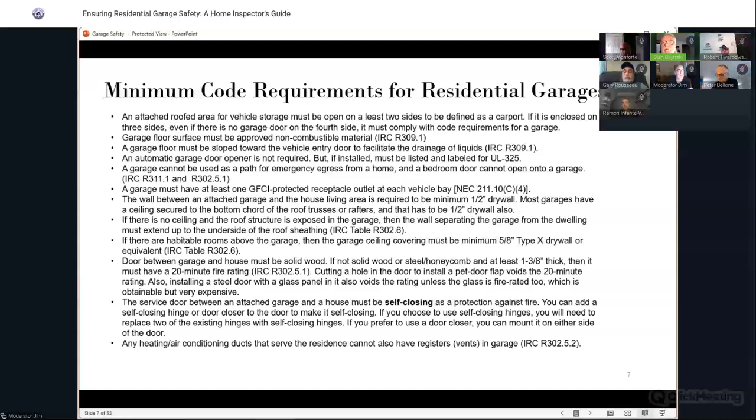I see people do that a lot because they're doing something in the garage even in the wintertime, whether they're woodworking or whatever, and they try to get a little bit of heat in there. So they cut a register into a duct that's passing through, and it's usually homeowner or aftermarket kind of stuff. All right, Jim. On that too, Stan, flex duct. It talks about the type of ductwork running through the garage, but you'll see guys that'll run flex. Yeah, we're going to get into some of that down the line here.

So the garage, like Rodney Dangerfield, does not get any respect from the standards of practice. To me, it should be addressed as a standalone component of the home. That's the way I feel. So the Connecticut standards, which I am most familiar with, on interior, say the inspector shall inspect all the interior stuff. And then at the end, they throw in garage doors and garage door operators. They don't say anything about safeties. They leave that open to interpretation. Our standards were meant to get us all to do a minimum of the same things, but it also opens everything up to interpretation by the individual home inspector.

In Massachusetts, they go farther. On their exterior, the inspector shall observe and report on garage doors if the garage is attached to the main dwelling, and operate garage doors if the garage is attached to the main dwelling, manually or by using permanently installed controls of any garage door operator. Report whether or not any garage door operator will automatically reverse or stop when meeting resistance during closing. Now, that's what should be in Connecticut's, in my opinion.

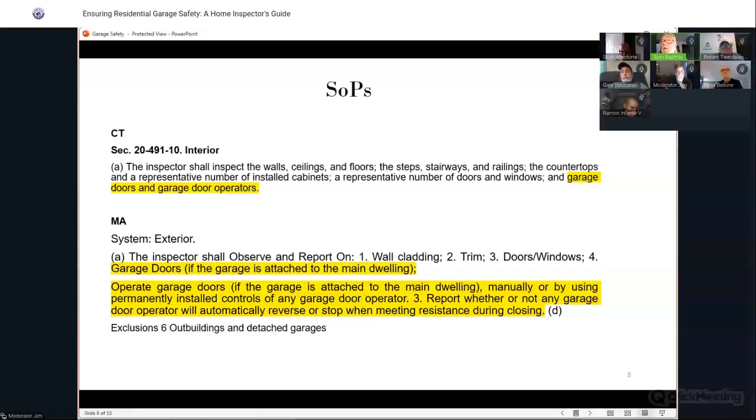But look at exclusion 6 down there. Outbuildings and detached garages are excluded. What is the difference between a detached garage and an attached garage? Why? And most standards are like that. Why do we not have to, at least to the standards, inspect a detached garage the same way we would do an attached garage?

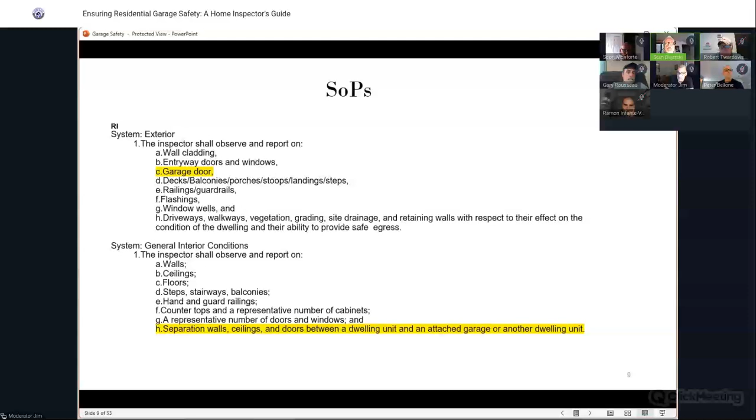Okay, Jim. So Rhode Island, exterior: garage doors. That's it. And then on interior, separation walls, ceilings, and doors between the dwelling unit and an attached garage or another dwelling unit. So at least they go a little further there. Florida, interior components, they include the garage door. And Jersey, garage doors, including automatic door openers and entrapment protection mechanisms, excluding remote control devices.

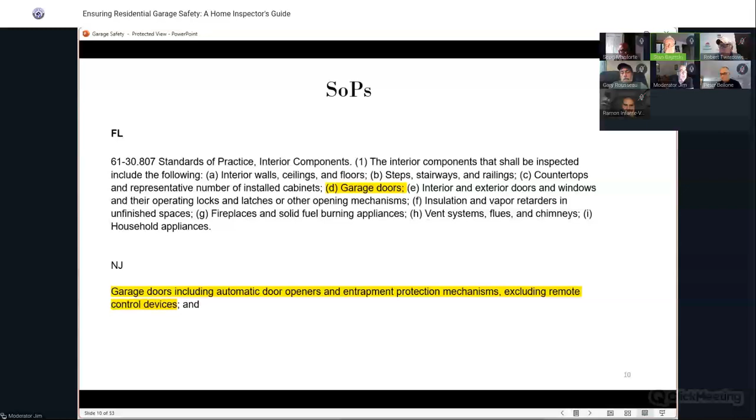So even though the standards are kind of thin and don't get into a lot of detail, most inspectors are using some kind of inspection program now, software. We all know, if you're using those, that they come through with a lot of stuff. And I had to take a lot of stuff that I didn't want to use out of my report. But at least all the things that we should be looking at are in there, and it's not just the minimal standards.

So walls and ceilings. The wall between an attached garage, some of this might be repetitive, but we're going to go through it anyways. The wall between an attached garage and the house living area is required to have minimum half-inch drywall. Most garages have a ceiling secured to the bottom chord of the roof trusses or rafters, and that has to be at least half-inch, like we said before. If there is no ceiling, then the separating wall must be sheetrocked all the way up to the peak.

There is a high incidence of fires started in the garage due to gasoline and other flammable materials often stored there. And either way, the intent is to create a half-inch drywall barrier between the garage and the house for fire protection.

So I don't have control of my mouse today. Jim is running this.

So only common walls, thank you, Jim, between garage and the house, not perpendicular walls, must meet this requirement. If a garage is detached but within 3 feet of the residence, any walls within 3 feet must have half-inch drywall. When there is a living space above the garage, the ceiling requirement ramps up to 5/8 type X fire rated drywall. Now, this brings up the question of breezeways.

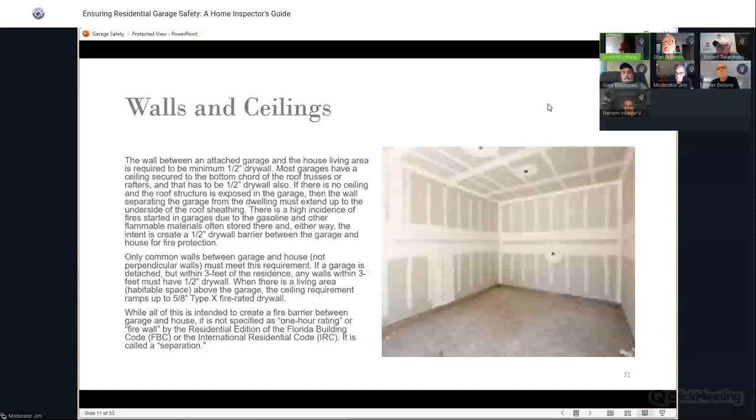So, there's a couple. I know Jim's got the slides. There's a couple of questions. I was laughing too, because we see the storm doors all the time. They'll put a storm door with a screen and leave the door wide open into the garage. That's a no-no, because now there's no self-closing hinges on there.

The other thing they ask is, are fire damper registers allowed, like they put in apartments? At some point, they blow open and close. I'm assuming that's what he's talking about. I would say if there's a damper and it opens up and there's a car fire or fire in the garage, I would say no.

Mass. Gary knows about this, right? Gary, you're saying you have to do a separate inspection for a detached garage? They're saying, in Mass, you have to do a separate inspection for any detached structure, right? Yeah, separate detached structures, you're supposed to start a whole new inspection. Can you put that in your report as just a detached garage, and then go through it? I do, but they would prefer us to start an entire new inspection just on that one building.

Why? Because it's a separate structure? Separate structure, separate building, lots of times has its own electric panel, heat system. So they like starting a whole new inspection. Oh, more money, more money.

And there's another one in here too, Stan. It said new lithium battery chargers for the cars can catch on fire, which is true. That's why our city is not putting them in this new parking garage.

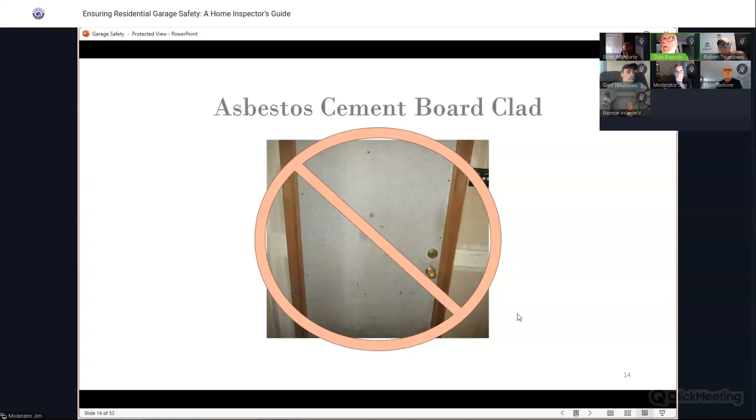I also bring up the environmental concerns regarding the asbestos, even though in that condition it's not an issue, but if you damage it. And do you know if that's a 20-minute fire rated door with that asbestos? I don't know that. So I always tell them to replace it with a fire rated door. This is a hollow core slab door. Gotta go.

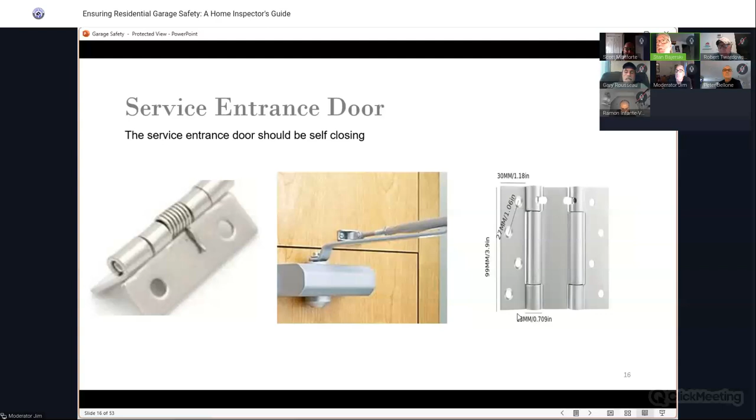Next, Jim. These are service entrance door hinges, called self-closing hinges. There's a realtor I work with who also flips. He bought a house that was on fire in Milford here and was renovating it. They put a new service entrance door in, and they put 2 self-closing hinges on it. When the inspector came, the door didn't close 100%. It closed like 98%, but it didn't latch properly. So they had to put the 3rd one on, and it worked like a charm.

So here we go with the ducts and other penetrations. Ducts in the garage and ducts penetrating the walls or ceiling separating the dwelling from the garage shall be constructed of a minimum number 26 gauge sheet steel, 1-inch minimum rigid non-metallic class O or class 1 ductboard, or maybe that's a 0, I don't know, or other approved materials, and shall not have openings into the garage.

Now, I'm not telling you this and expecting you to pull out a gauge and chop a piece of the duct off and make sure it's 26 gauge. It's just to know that there are certain requirements. Class 0 or O is defined as air ducts and connectors having burning characteristics of 0. Class 1 means air ducts and connectors having a flame spread index of not over 25 without evidence of continued progressive combustion and a smoke developed index of not over 50. The duct boards are marked with their class ratings as an imprint or sticker on the board.

Any type of register or grill in the ceiling of the garage that opens directly into the attic over the home is not allowed. We occasionally see vents retrofitted to provide ventilation to cool a hot garage in the summer, or to provide combustion air for a gas furnace or water heater in the garage. Combustion air can also be provided by a vent through the wall. Next, Jim.

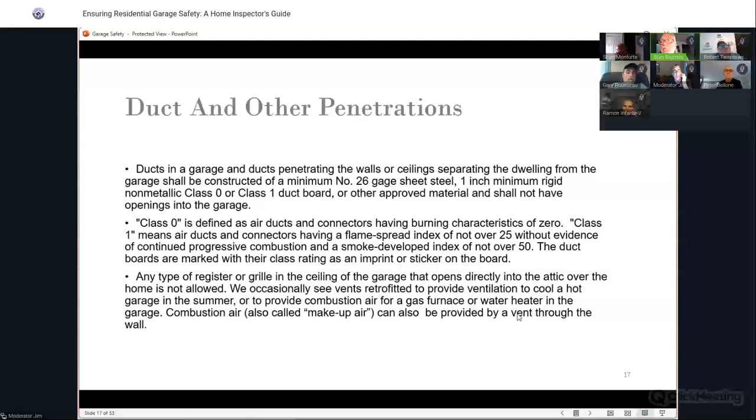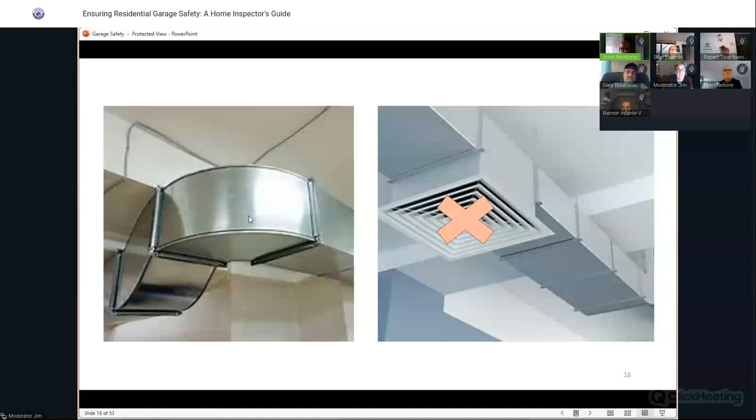I did a condo complex in Rocky Hill. Every single unit, I actually did 2 within a month, and I got a call from the town of Rocky Hill building department telling me to stop calling out ductwork in the garage because the town says it's okay because of the thickness of the steel. So I said, okay, what about carbon monoxide? What about little joints and stuff like that? It doesn't have to be encapsulated? And they said no. If anything, Jim, you want to insulate it and use some foil tape around it. That's what I would do. The duct itself is fine. And then obviously a carbon monoxide detector in the house, and then you're covered. Okay.

Other penetrations. Any openings around vents, pipes, ducts, cables, and wires at ceiling and floor must be sealed with an approved material to resist the free passage of flames and products of combustion. So that might be an answer to what you can do with the ductwork if you really wanted to get into that. The material filling the annular ring-shaped space around the penetration does not have to meet the ASTM E136 standards, whatever that is. Most homes have a half-inch drywall panel installed in the attic access opening, which is fine.

But when you put something else in the opening, it must be equivalent to half-inch drywall, which has roughly a 20-minute fire resistance. The 1/4-inch plywood panel at most attic ladders does not meet that standard. There are several solutions. There are fire-rated attic ladders on the market, starting at about $800 plus installation. Not cheap. They far exceed the equivalency requirements. Also, there are attic ladders that have a fire retardant applied to the plywood face. Install a non-fire resistant attic ladder somewhere in the house instead of the garage.

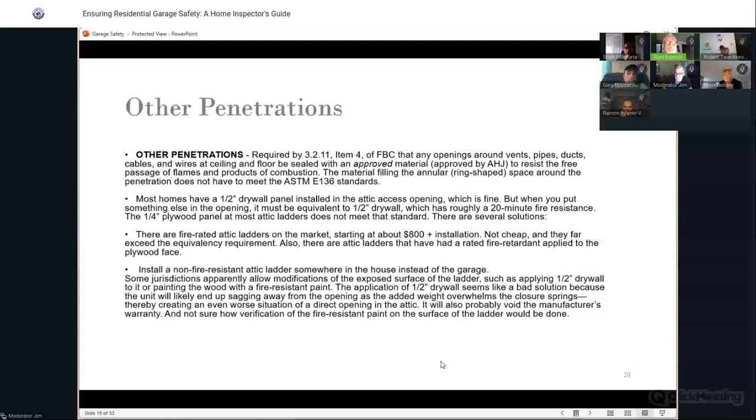Some jurisdictions apparently allow modifications of the exposed surface of the ladder, such as applying a half-inch drywall to it or painting the wood with a fire-resistant paint. I've never seen a can of paint marked fire-resistant, but maybe I haven't shopped enough. I don't know. The application of half-inch drywall seems like a bad solution because the unit will likely end up sagging because of the weight and make it worse, basically. So yeah, a lot of the foam now in attics has a fire resistant paint that's sprayed over it too. You know, a lot of that closed cell foam, open cell foam.

So this is a house I did a while back where the plywood's on there and the opening's a mess. And if you went up into the attic, this is what was there. So I told them, I don't know what your plans are for the house, and I know that that pull down makes it very easy to access that nice space up there for even storage, but you got to rock that wall all the way up to the peak. So again, even though I said that specifically, I also tell them to bring that garage up to current fire safety standards.

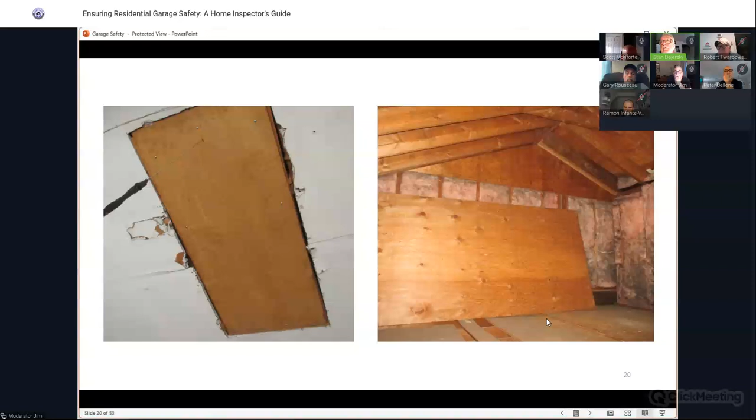So now we're going to talk about garage receptacles. Obviously, there's been a big change lately in where GFIs are supposed to be included in garages, which is everywhere now. But receptacles in the garage were first required to be GFI protected by the 1978 edition of the National Electrical Code. Initially, an exception was made for receptacle outlets that are not readily accessible, at 6 foot 8 inches or above, and receptacle outlets for dedicated appliances that are not easily movable, such as a freezer, refrigerator, or mounted sprinkler control panel.

Then in 2008, they eliminated those exceptions, and now all garage receptacles are required to be GFI protected. The mandate for ground fault circuit interrupter protection for receptacles in wet areas around the home began in the 1971 edition of the NEC, and at first only exterior receptacles and ones near a swimming pool. As the NEC has updated with new editions every 3 years, the locations required have been expanded or tweaked with almost every cycle since then.

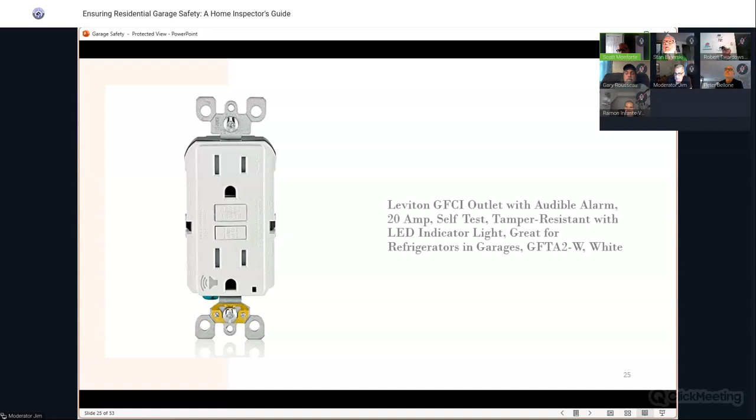Well, Jim, sometimes we've seen it before where they have a GFI that's really either on a breaker or on a bathroom or something else. So that GFI really doesn't have to be a GFI. It could be a regular outlet. So I kind of look for it. You trip it and then you've got to go look for it. But I was just going to say, I can't remember. Okay, Jim.

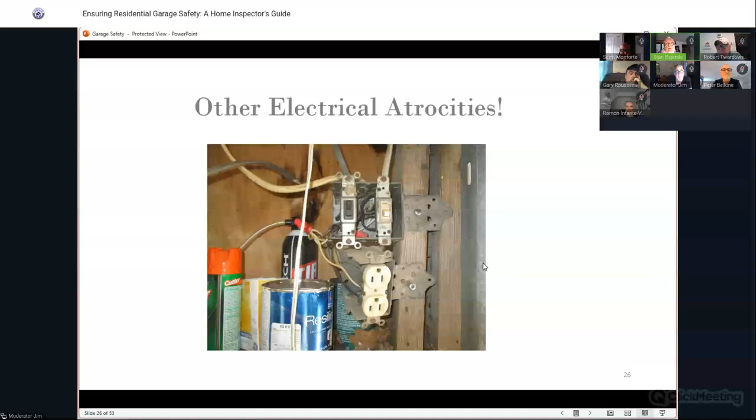And then, every other electrical issue that you can imagine can be in a garage. This is one picture. Take a look at that mess. Those electrical boxes don't have sides on them. They're wire nutted together. I don't know what that wire is just coming across the paint can there. It might be an extension cord or something. That's a freaking mess right there. So you've got to look for all that other stuff too, besides what we're talking about today.

So garage bay door safety. An imbalanced garage door can close accidentally and injure users.

Heavy garage doors can damage vehicles and property, plus the garage door components, especially the motor, wear out faster and can become damaged. There are still manually operated garage bay doors. These doors still require safety features that we can call out. So if I let a manually operated garage door go and it continues to fall, I will tell them that they should have somebody come out and adjust the spring tension cables, all that good stuff.

Balancing a garage door is necessary for safety and for the smooth long-term operation of the garage door. An imbalanced garage door either slams shut or rapidly opens. Whatever type of garage door you have, torsion springs or extension springs, balancing a garage door is a DIY project that usually takes less than an hour to complete. And a balanced garage door is one that opens and closes easily.

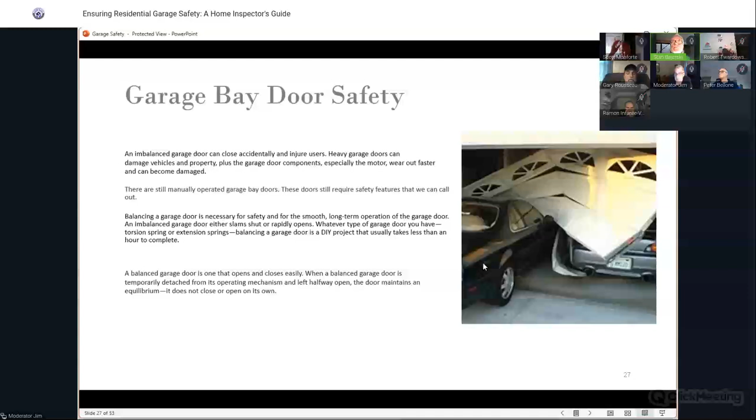When a balanced garage door is temporarily detached from its operating mechanism and left halfway open, the door maintains equilibrium. It does not close or open on its own. I don't disconnect the operator, but in manually operated doors, I'm going to say probably 75% of them will close on their own.

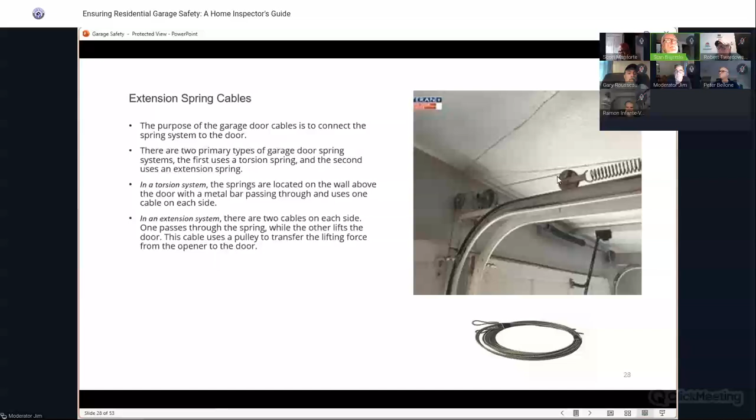So the purpose of the garage door cables is to connect the spring system to the door. There are two primary types of garage door spring systems. The first uses a torsion spring and the second uses an extension spring. In a torsion spring system, the springs are located on the wall above the door with the metal bar passing through it and uses one cable on each side. In an extension system, and this one has both, there are two cables on either side. One passes through the spring while the other lifts the door. This cable uses a pulley to transfer lifting force from the door opener to the door.

Okay, Jim. Balancing a garage door. Now, we're not going to do this, obviously, but if you want to tell your people how to do it, I'm not even sure I would want you to do that because there's some liability involved in there. But balancing a garage door by adjusting the torsion spring is an important task that ensures the longevity of the door and prevents damage to the opener.

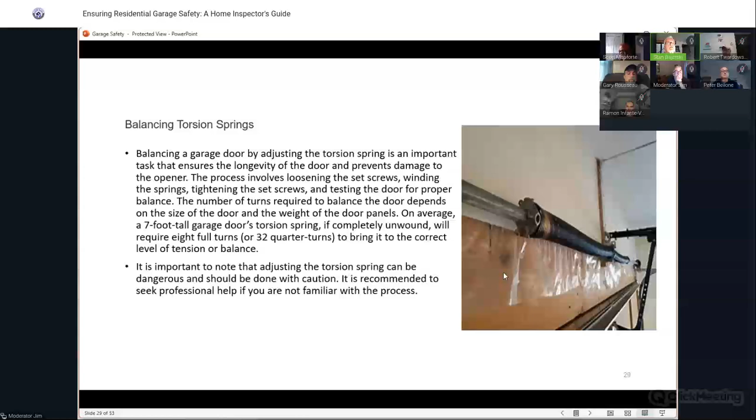The process involves loosening the set screw, winding the springs, tightening the set screw, and testing the door for proper balance. The number of turns required to balance the door depends on the size of the door and the weight of the door panel. On average, a 7-foot tall garage door's torsion spring, if completely unwound, will require 8 full turns to bring it to the correct level of tension or balance. It's important to note that adjusting the torsion spring can be dangerous and should be done with caution. It is recommended to seek professional help if you're not familiar with that process.

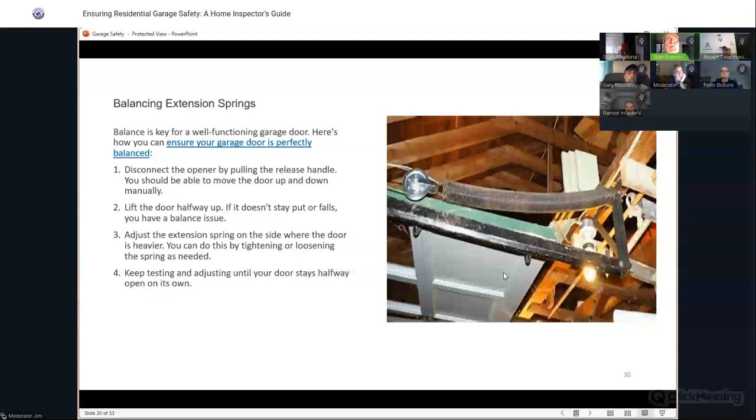And balancing is key for a well-functioning garage door. Here's how you ensure your garage door is perfectly balanced. Disconnect the opener. All right, we'll skip this, Jim. We just talked about that. My bad. So extension cords feeding door openers. You're not supposed to do that. I call that out every time. You've got to get an outlet there, even though it's up in the ceiling.

The big debate on how to test garage reversing safeties. This has been ongoing for a long time. Okay, Jim. I don't know if I want to go through all this, but part of the debate is manufacturers say put a 2x4 at the bottom of the door and let the door strike that. If that door doesn't want to stop, it could cause damage. I would rather push up on the door, and if it's pushing against me too hard, I'm just going to let it go and tell somebody it needs to be checked by a professional.

I've had the arm pull off a door when I tested it, even like that. When I looked at it, I should have looked at it first. There were 150 screw holes in the wood that was holding that arm to the door. So this was an ongoing problem. I put it back together. I got a call that evening saying that when the folks came home, the thing came apart again. So I had a partner at the time. He and I went back, and let me tell you, a tornado can blow that house apart, and that arm would still be mounted to that door when we got done.

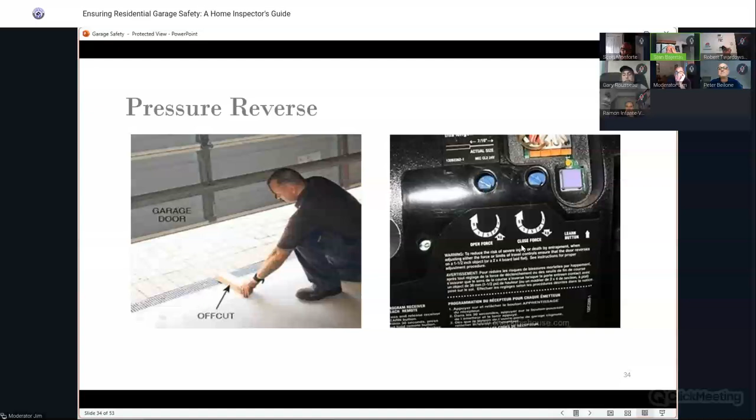So here's the 2x4 underneath the garage door, and here's a method of adjusting that closing force, opening force. It's kind of simple. You got to work at it a little bit. I'll point that out if the opener wasn't working right. It should be tested monthly, right, and adjusted as needed.

And then photo beam reverse, kind of simple to check. They could be dirty. They could have light reflecting in them to stop them from working. They could be blocked by something. You have to check both sides. Bent. Next, Jim. The height is kind of a concern in some cases. I don't really check that unless they're like too high.

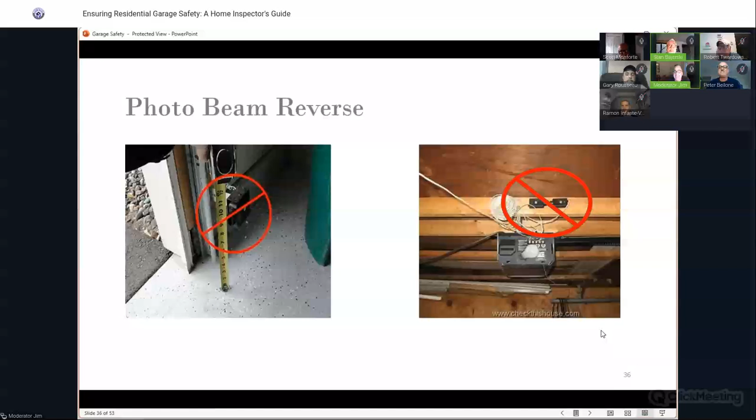And then combustion appliances in garages. You know, most of the time it's going to be gas, right? And the furnace should be 18 inches above the floor, any combustible compartment, to reduce the risk of igniting gas fumes that might originate from vehicles or other sources in the garage.

And good air circulation around the appliances, with the exception of the condensing units, which are providing their own. And so you got to be careful with that kind of stuff, and you got to know what your local building department requires, or you don't have to know, but you should know. Next, Jim.

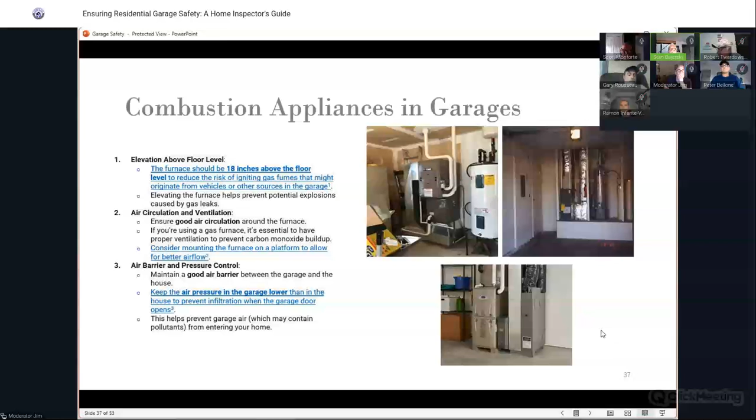So in summary, for those things, most garages, because of the variety of ages of the homes we inspect, will not be 100% compliant to these requirements. I point out the deficiencies and make a general statement that the garage should be brought up to current fire and electrical safety requirements for attached garages.

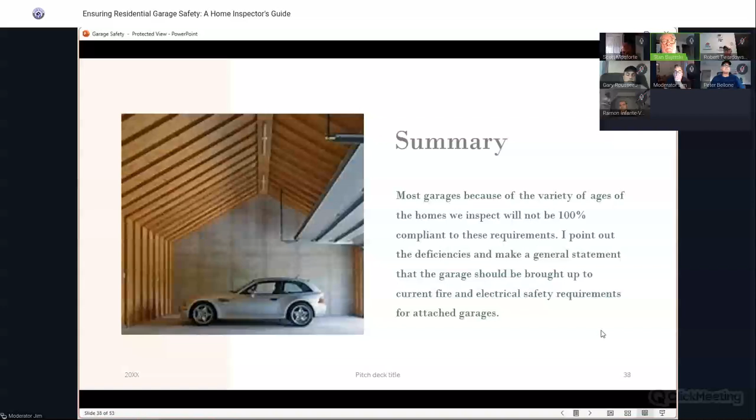So garage floors. Garage slabs can be safety concerns if settlement cracks develop that become tripping hazards, create a condition that can compromise the structure, or cause the rise of a doorway to become excessive.

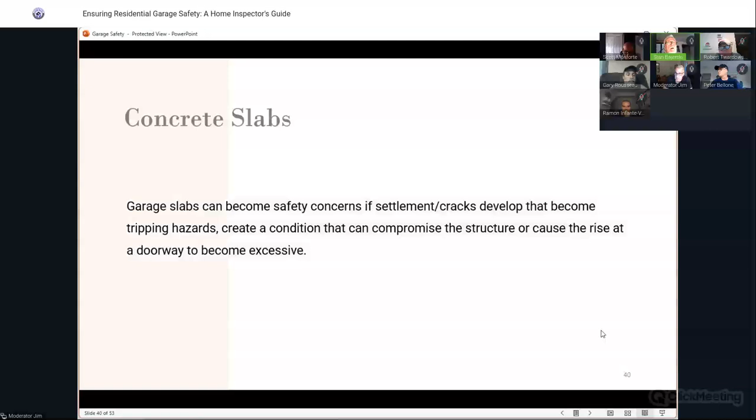Potential structural issues. If that slab there is allowing that wall to move, if it's being undermined, you know, it could be the slab itself doesn't even need to be there. That is not a structural component, but there is a possibility with damage to the slab that you can have some structural concerns. So you got to kind of figure that out if you see something like this. That's a pretty significant crack right there, but they can be tripping hazards. So it is a safety concern.

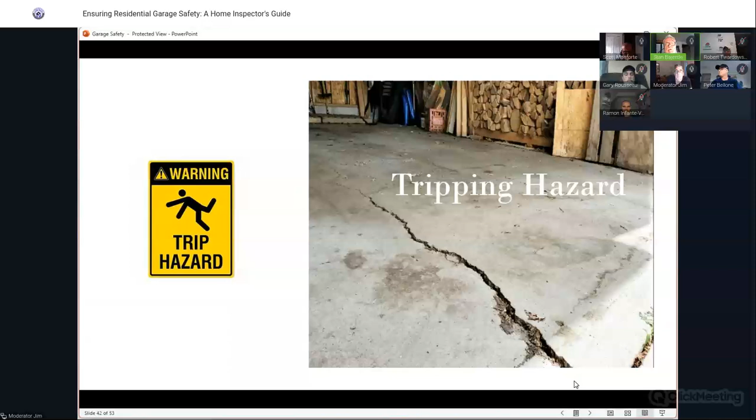And you shouldn't store wood in a garage either. Well, that's for another webinar.

If that little piece of wood, whatever you want to call it, step down there was not there, that would be excessive rise into the garage. So sometimes slabs in that area can settle as well. You know, I don't know about you guys, I don't even have to measure anything. You just walk over something and you can kind of tell, you're used to picking up your foot so high. If it's too high or too short, you kind of feel it.

So here's something that I'm going to say: in 37 years, I might have seen a dozen wood floors in garages. They're usually detached garages. So can a wood framed floor support a car? Generally, yes, it could potentially support a car, but there are important considerations to keep in mind.

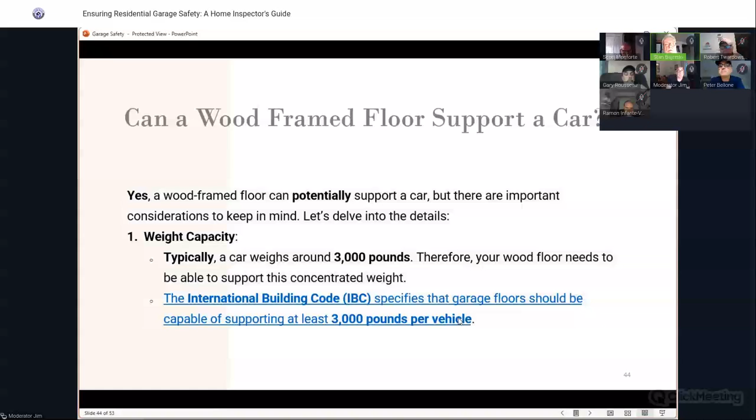So weight capacity. Typically, a car weighs around 3,000 pounds. Therefore, your wood floor needs to be able to support this concentrated weight. The International Building Code specifies that garage floors should be capable of supporting at least a 3,000 pound vehicle. Well, that makes sense, right? One car garage. Go ahead, Jim.

So live load, dead load. When designing a wood floor for a garage, you need to account for both live load, the weight of the car, and dead load, the weight of the structure itself. A common approach is to consider 50 pounds per square foot live load, plus 150% of the highest wheel weight of the vehicle that is most likely to be in a garage, placed anywhere on that floor. And add this to the dead loads.

Keep in mind that a 2x6 wood floor may not hold up well over time. You might want to consider pouring concrete over the top of the wood floor to enhance its strength and durability. Well, the floor is not just the issue if it's not on the ground. You'll see in some pictures that are coming up.

So modern cars have catalytic converters that generate heat. This heat can potentially start a wooden floor on fire, especially if it's gas or oil soaked. Cars can also leak fluids, which can further damage the wood. Additionally, consider carbon monoxide emissions. If you don't open the garage door before starting a car, CO can settle and pose health risks.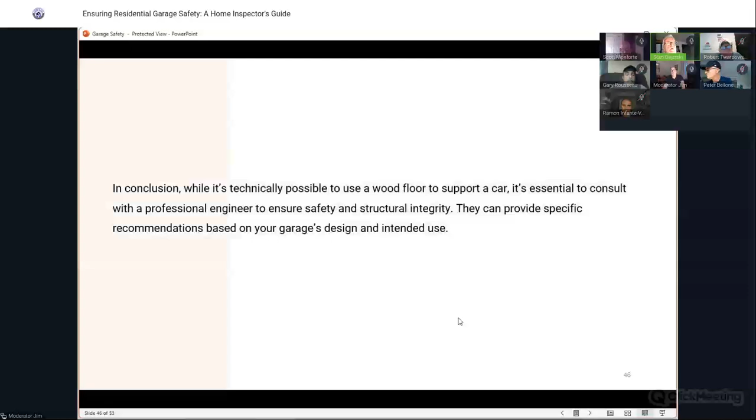Lateral bracing and shear stress of the wall supporting the floor are also crucial factors. In summary, you need more than standard tables to design this safely. Consult an engineer. And then moisture protection and insect protection for the wood. Next. So in conclusion, while it's technically possible to use a wood floor to support a car, it's essential to consult with a professional engineer to ensure the safety and structural integrity.

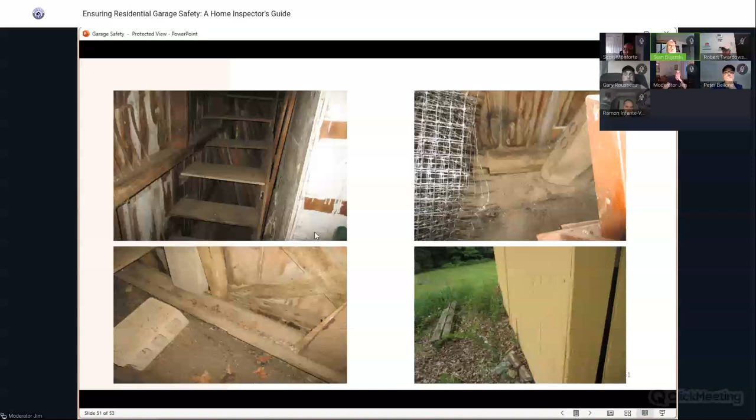And then water was leaking in at the sills, and the sills, it was funny, down not quite the center, it was all rotted. And then if you looked at the exterior wall there, there's earth and vegetation and leaves and crap piled up against there, just soaking all of that. So I would have called that a barn. They wanted to convert it to a garage, and I said, well, then there's a lot of work you got to do. So you can't just assume that what you're seeing is going to stay that way or be used the same way.

And, you know, protect yourself. So the garage, it's always safety first, right? The garage is jam-packed full of potential safety issues. Take your time, be thorough, be smart, document everything. Cover your butt and you'll cover your client's butt. I think that's it, huh?

So a couple questions. Couple things, Stan. Can you talk a little bit about safety protection on oil tanks in a garage? Talk a little bit about what you should see with that. And sometimes you'll see a meter in there. Sometimes the water main will come through the side of the garage. Well, the tanks have to have bollards in front, right? Bollards, yeah.

I don't know if I've ever seen a water meter in a garage or anything like that. You're talking about gas meters? I've seen gas meters. Sometimes you'll see a water main or a water line coming through. Most of the time they're tucked away, but it's more the tanks. But in an unheated garage, you got water running through. Yeah, well, you want to protect everything, right? Yeah, sometimes it's wrapped with heat tape.

And I think when you're in the business long enough, some of these things just pop out at you, and you go, "Oh, that should have some kind of protection." If you feel that way, just say it. That's my opinion. If you think something's wrong, make a statement, make a comment, or as we call it today, a narrative, and just pass it along. It doesn't hurt.